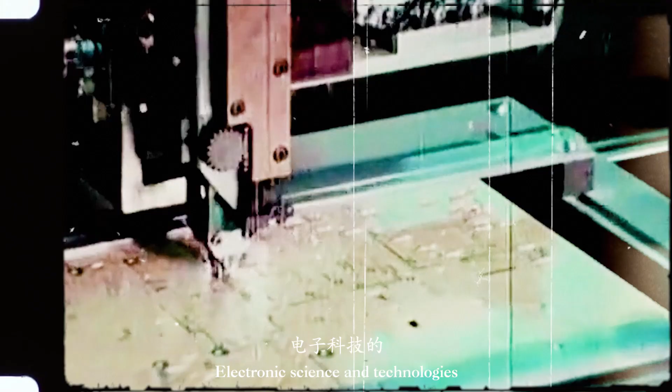In the 1980s, with the country's strength and rapid economic development, Shenzhen and its surrounding areas took the lead in economy, farming, and industry. At the same time, electronic science and technologies witnessed a leap and vigorous development.

Beginning in the 1990s, the Guangdong Greater Bay Area, with Shenzhen at its core, saw rapid development and progress of the electronics industry: digital products, communications equipment, smart wearables, smart home devices, energy storage, power equipment, electric vehicles, and the internet, upgrading extremely fast. Smart living is gradually entering thousands of households.

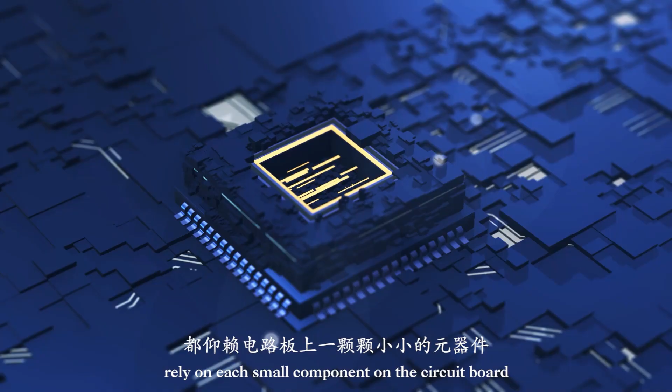However, all the transformations and innovations of the smart era rely on each small component on the circuit board. Jinbeili emerges at the right time. In 2000, the predecessor of Jinbeili was founded in the important electronics town of Shajing, Dongguan.

After more than a decade of arduous and extraordinary efforts, we built factories: Dongguan Jinbeili Electronics, Xiamen Jinbeili Electronics Company Limited in 2014, and Xiamen Jinbeili Industrial Company Limited in 2023.

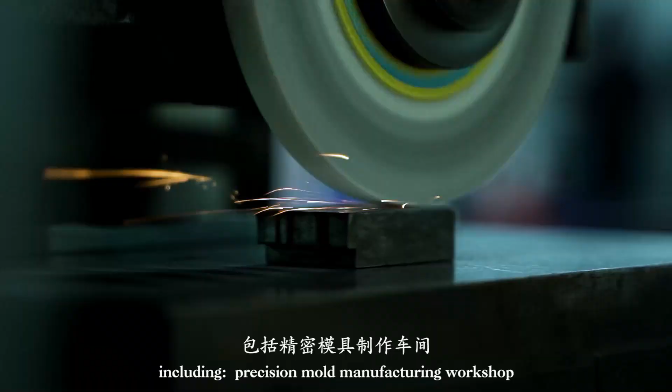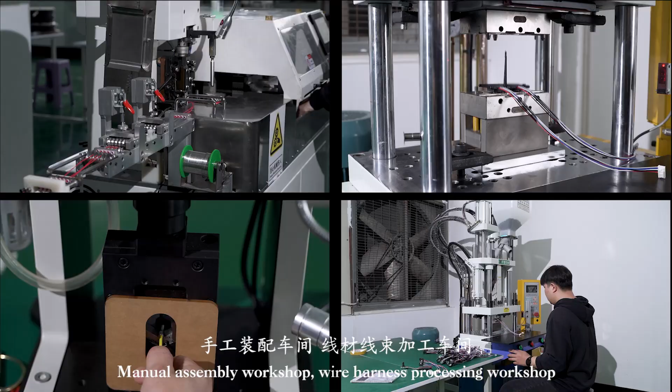Our factory covers a total area of over 10,000 square meters with complete production equipment and facilities, including a precision mold manufacturing workshop, vertical and horizontal injection molding workshops, a precision metal stamping workshop, an automated production workshop, a manual assembly workshop, a wire harness processing workshop, and a customized metal processing workshop. We are capable of meeting product customization, diversification, and small-batch production, innovation, smart manufacturing, and quality assurance are our core competitive advantages in leading the market.

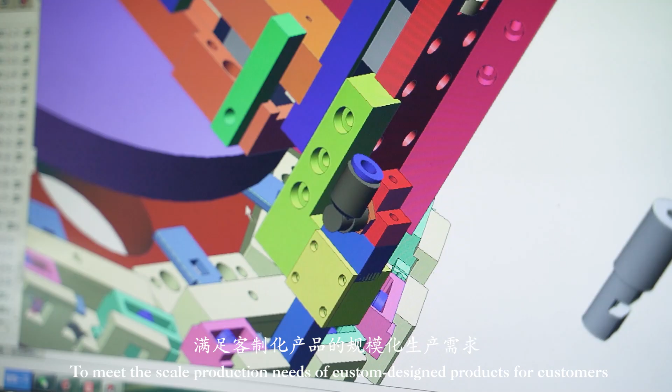We independently design and develop customized automated production equipment to meet the scale production needs of custom-designed products for customers.

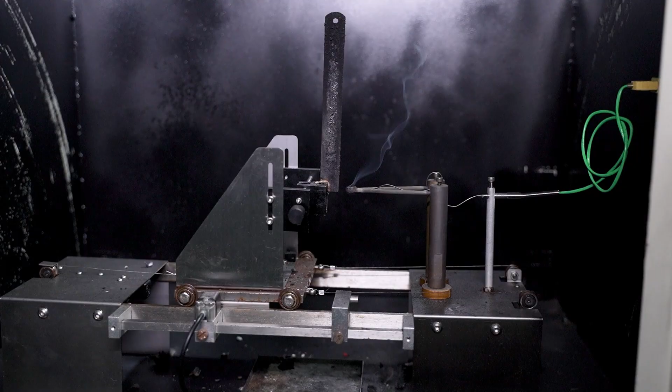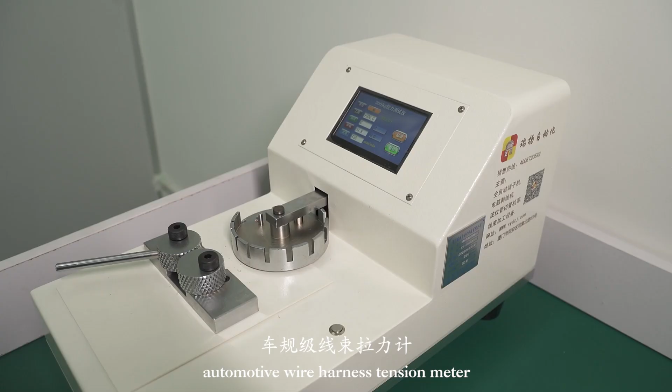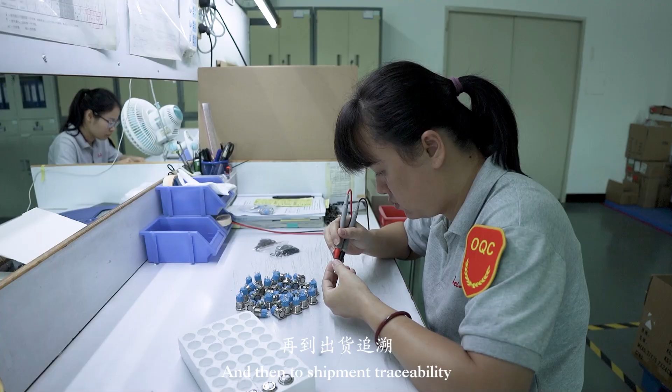We have a well-equipped laboratory and experienced quality control team, equipped with precision testing equipment including electron microscopes, LCD smart scopes, glow wire testers, salt spray testers, reflow soldering ovens, multifunctional life testing machines, LHS testers, coating thickness gauges, automotive wire harness tension meters, automotive wire harness section analyzers, and wire sequence detectors. From material origin to process inspection, and then to shipment traceability, all are under monitoring to ensure high-quality products.

Our product development team, with multiple members having over 20 years of experience, focuses on market demand and keeps exploring and innovating new products. Therefore, our factory has obtained multiple invention and utility model patents, and the honor of being recognized as a provincial high-tech enterprise. Quick response, fast delivery, flexible customization, and one-stop diversified product services.

This is the core advantage of Jinbeili in enhancing brand competitiveness for customers. Our young and dynamic, high-level domestic and international sales team, and experienced after-sales service team have been providing customers with efficient, professional, and high-quality service throughout the entire process.

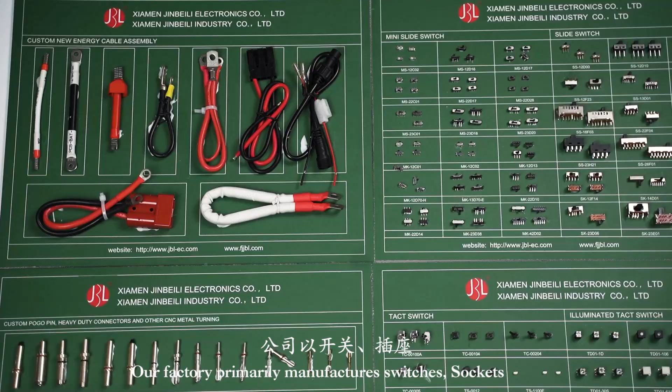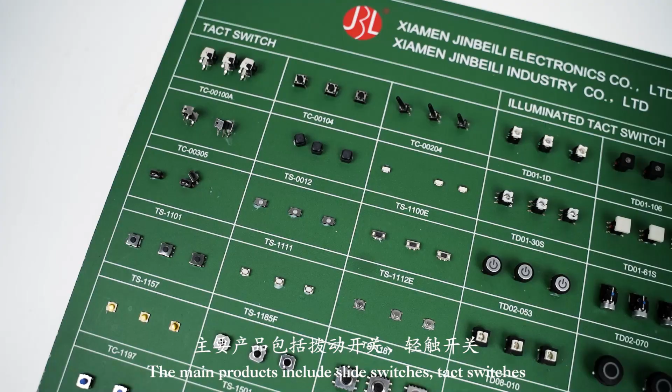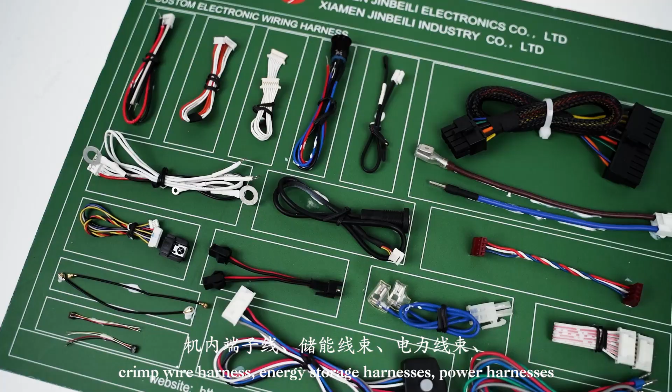Our factory primarily manufactures switches, sockets, and other connectors as the main line, while we also gradually extend into complementary products. Main products include slide switches, tact switches, illuminated tact switches, push-button switches, audio jacks, DC sockets, USB connectors, and waterproof Type-C sockets, energy storage connectors, crimp wire harnesses, energy storage harnesses, power harnesses, new energy vehicle cables, high current heavy-duty connectors, and custom metal and wire parts.

These products are widely used in small household appliances, digital products, communication equipment, robots, smart toilets, massage equipment, energy storage equipment, and electric vehicles. Various products lay a solid foundation for the company's future diversified development, providing customers with one-stop product services.

Jinbeili has obtained ISO 9001:2015 Quality System Certification and IATF 16949:2016 Automotive Quality System Certification. Our high-quality products and services have earned recognition from well-known clients both domestic and international, including Foxconn, BYD, Ogawa, JOMOO Group, Koda Group, Energizer Holdings, and others.

Today, Jinbeili possesses the direction and drive for internationalization, specialization, innovation, and diversification. In intense market competition, we always maintain a clear mind.

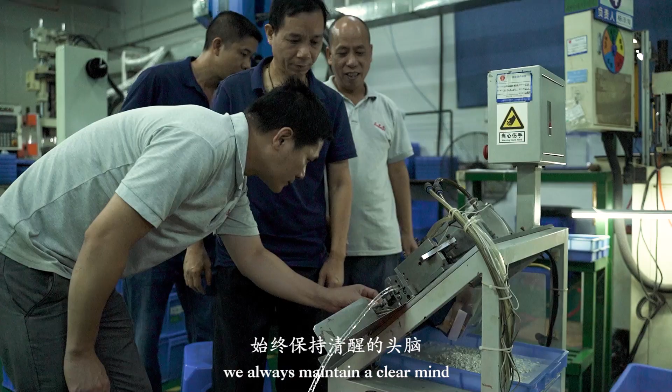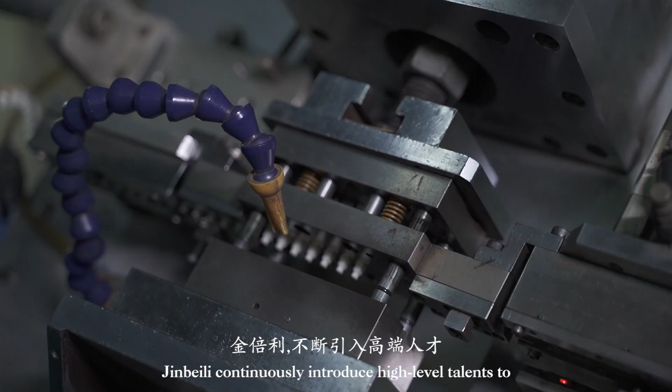We continuously guide our products with an innovative perspective, stick to perfect product quality with greater expertise, and seek more international cooperation with a macro perspective. Jinbeili continuously introduces high-level talents to promote the company's sustainable development, and has been advancing and progressing together with the motherland, developing together with the world.